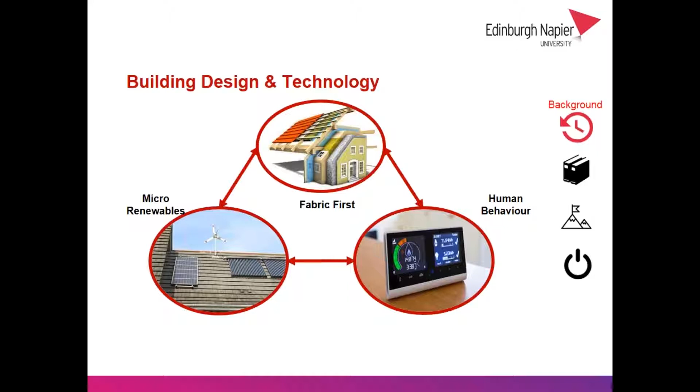Before we get there, we can't really talk about house building or renewable energy systems without first paying homage to the Scottish building standards. Quite quickly, there are 6 of these standards that are mandatory and 1 which still remains voluntary, and each section speaks directly to an aspect of your dwelling's building design and technology requirements.

So today we'll be referring to section 7 quite heavily at the start of this webinar. This is the voluntary section that focuses predominantly on sustainability aspects for new house building, and it includes elements from section 3 around ventilation, section 5 around noise, and section 6 around energy.

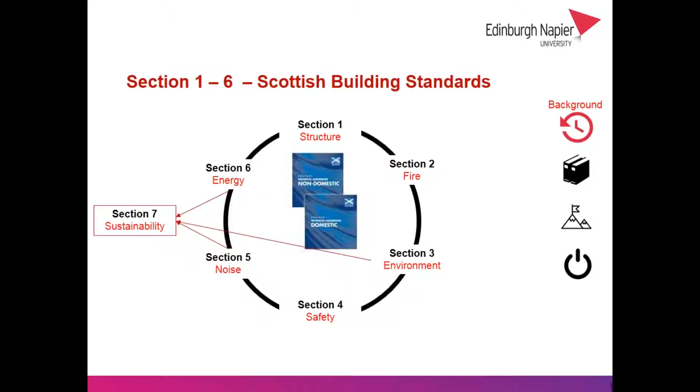So again, just a brief moment to stop and recognise the existence and the structuring of this section 7 sustainability, because whilst it's still voluntary in some respects, it is still being used as a standard that we can adhere to make our homes more energy efficient.

This section is unlike any of the other 6 sections in that it uses a metal labelling system to attract designers and builders to use it. And this is the bronze, silver, gold, and platinum. So if you design and build your home to the other 6 standards, you effectively achieve a bronze standard home.

So if at any point in the dwelling's design you add renewable energy systems without fulfilling all of the other aspects of metallic colouring, the label of your home is then specified as being active, meaning that the dwelling is actively generating part or all of its own heat and power requirements. And the more focus you put on each of these aspects, the higher up the metallic labelling system you go.

Two of section 7's metallic colouring system is divided into 8 aspects. So the silver portion and the gold portion is divided up into 8 distinct aspects.

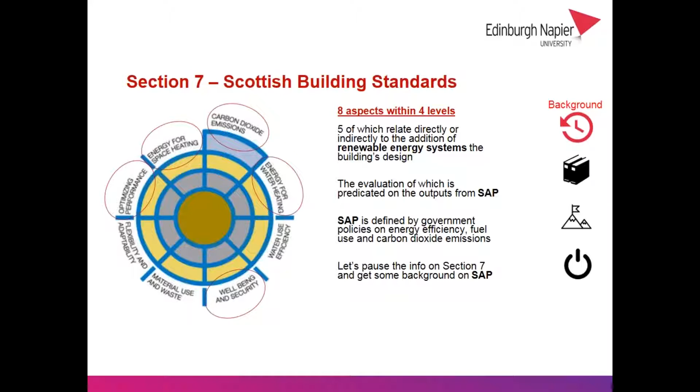And the big takeaway here is that 5 of these aspects relate either directly or indirectly to renewable energy systems and renewable energy technologies. Lastly, the evaluation of whether or not your design achieves certain aspects is completely predicated on the output of the energy performance software that we use to construct energy performance, and what the industry calls SAP. So there's a new term.

So what is SAP? Well, anything related to any aspect of your dwelling's energy requirement and energy performance is defined within this SAP, the Standard Assessment Procedure software. So you really can't work in the domain of domestic dwellings and domestic construction without the use of SAP and understanding what it requires. SAP probably does deserve its own webinar, but the important thing is that we recognize it here on our way to talking about micro-renewable systems.

And the big takeaway here is that SAP is a software used to define your home's energy efficiency, and then ultimately produces all the all-important energy performance certificate, or the EPC.

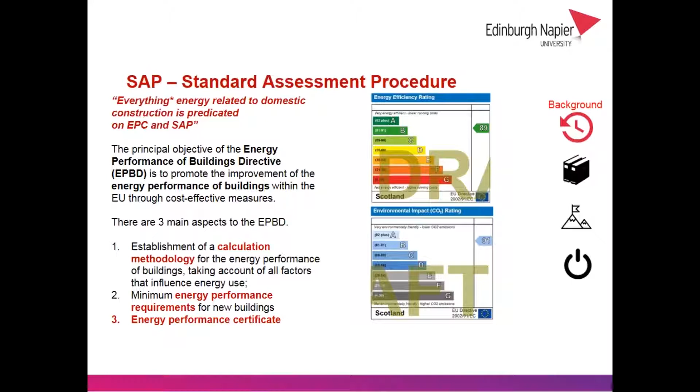So why is this important, and why are you hearing about SAP when you showed up to hear about renewable energy systems? Well, we'll get to that in a few minutes, but before that, you should be aware of some terms used by SAP, which are used to evaluate whether or not your home should be built under the guidance of section 6, and that's the energy one.

So when your designer is virtually constructing your building, your home, in this SAP software, one of the final outputs is the DER, or what we call the dwelling emission rate. And whilst your designer is doing that, the SAP software effectively creates a comparator or notional dwelling that is built to the very basic standards of energy efficiency. And that's what we call the TER, or the target emission rate.

So ultimately, your designer needs to virtually construct a dwelling whose DER is lower than the TER. And the greater the difference, the further up that metallic colouring scale you get in section 7.

When we say emission rates, we're explicitly referring to the carbon dioxide, the CO2 emissions that are emitted from your dwelling during its operational life. That has nothing to do with the CO2 characteristics of how the house is built or the materials it's built from. It's specifically relating to the electricity and heating you use to keep the home powered and warm.

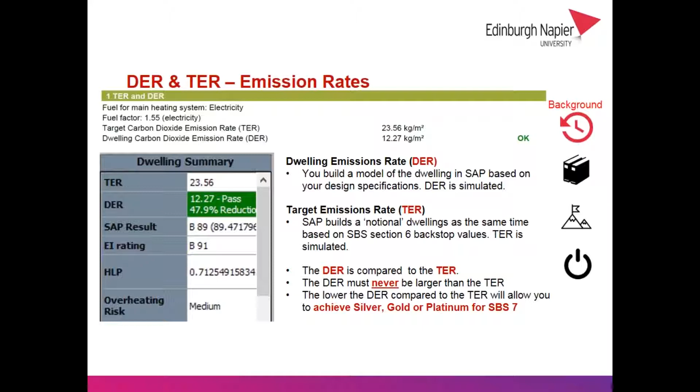According to the standards in section 7, your dwelling will achieve silver in aspect 1, which relates to CO2 emissions, if your dwelling's DER is lower by any measure than the TER.

If the dwelling emission rate, the DER, is lower than the TER by 30% or greater, up to 43% or more, then the home will achieve gold standard. So when your DER is better than 43% over the TER, your home achieves gold in that aspect for carbon dioxide emissions.

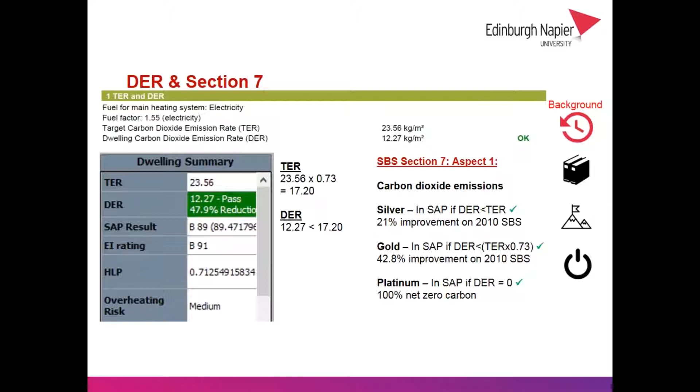A final few words on section 7 before we get into the relevance of this in relation to renewable energy systems. SAP also produces a very valuable number, the space heating requirement, which is the amount of energy your dwelling theoretically needs to keep its occupants warm. That's the total energy requirement per year divided by the total floor area of the dwelling you're trying to heat.

This number is used in some capacity to size the heating system you need to install. It also comes back to the fabric-first approach we mentioned earlier. The more energy efficient your building fabric is—walls, floors, windows, doors, etc.—the lower that number will be, and the less work your heating system will have to do to achieve it. So it all begins to tie together.

Section 7 aspect 2, for space heating, is also a target for silver and gold. If you're building a house or flat, this guidance in aspect 2 tells you what target you should be aiming below. In our example, we have a home whose space heating requirement is 13 kilowatt hours per meter squared per year, which falls under the 30 kilowatt hours per meter squared per year threshold for gold—so it's essentially a gold standard home in terms of aspect 2.

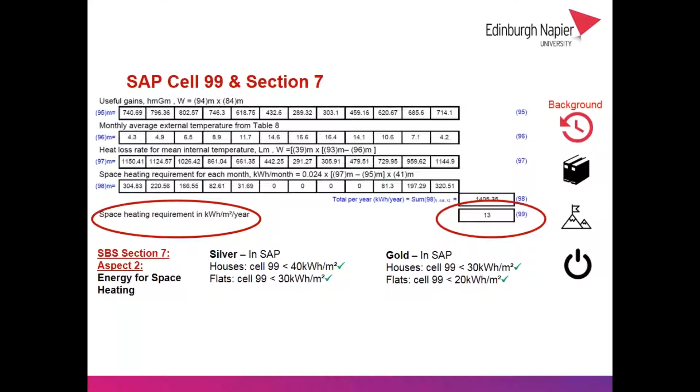Now back to other aspects within section 7 that speak directly to renewable energy systems—this time for water heating. That last aspect, aspect 2, was for space heating, and this is for water heating. The building standards treat both separately, even though you might be getting the energy from the same power source.

This aspect is affected by the size and type of renewable energy system installed on your dwelling, and the higher the percentage of hot water demand met by your preferred renewable energy system, the higher up that metallic colouring scale you go. Again, there's a theme here: getting closer to gold, closer to platinum—moving from bronze to silver and silver to gold—requires you to do quite a bit more in terms of carbon dioxide savings.

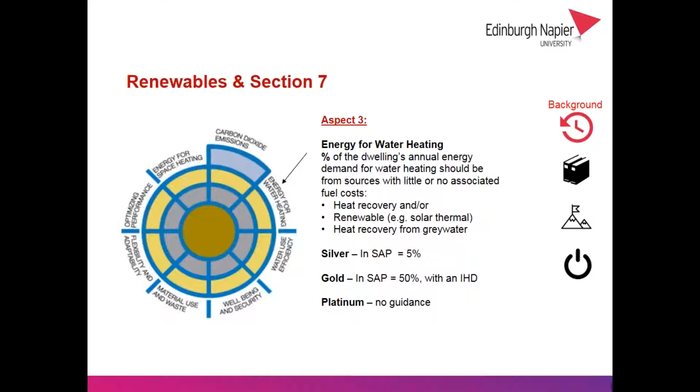Last words on building standards in section 7, concluding our background portion of the presentation. Aspect 5 is often an overlooked aspect that might seem quite trivial when you read the standards. However, it is potentially the most important, because it specifies the in-home display and the new home user manual that we mentioned earlier as one of our key components for energy savings.

Research is quite clear on this: to make the most of your newly built energy efficient home, all its characteristics, and to keep energy bills low, is very much predicated on energy use behaviours. You can build an extremely energy efficient home but use it unwisely, and that can really affect your overall energy consumption, knocking on to your energy bills and CO2 emissions. So we must provide occupiers with tools to help them understand and use their new homes effectively. This by no means excludes self-build—just because you understand your home much more than someone who buys from a mass house builder doesn't exclude you from this standard.

So now let's bring that all together.

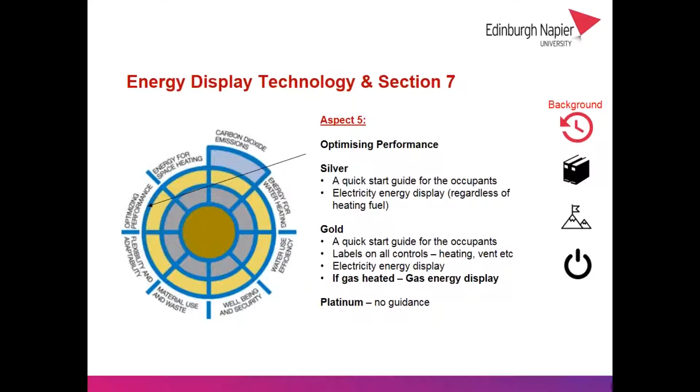Recently we've witnessed the introduction of a new iteration of SAP called SAP 2012. So dwellings that previously passed on SAP 2009, and therefore passed the energy and CO2 requirements allowing them to be built, are not passing the energy and CO2 requirements for SAP 2012.

So if you're not influenced by the notion of renewable energy systems because of your building's location - if you're off the gas grid and looking into options for renewables and how to provide more efficient energy supplies - or if you're not motivated by the cost benefits of renewables, or the environmental benefits of renewable energy systems, then please be aware that it has become, and will become, increasingly challenging to design and construct new dwellings without the integration of some type of renewable energy system.

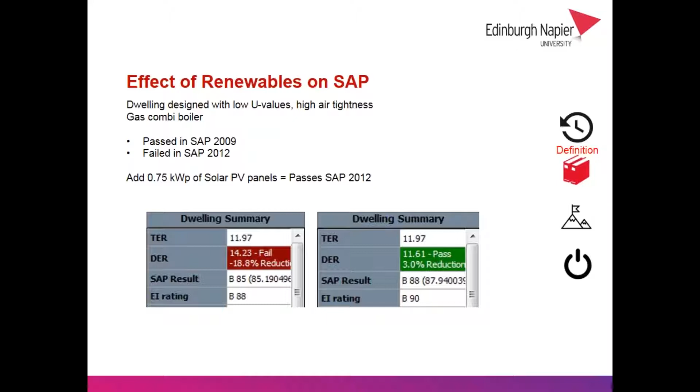So we're on this policy chart, so to speak. We've spoken around the topic of renewable energy systems for long enough - let's get into the core of this webinar.

For the avoidance of any doubt, when I refer to renewable energy systems, I mean technologies that generate energy through naturally reoccurring phenomena - so that's solar and the movement of wind and water. Explicitly, these are energy generation technologies that replace technology depending on burning fossil fuels.

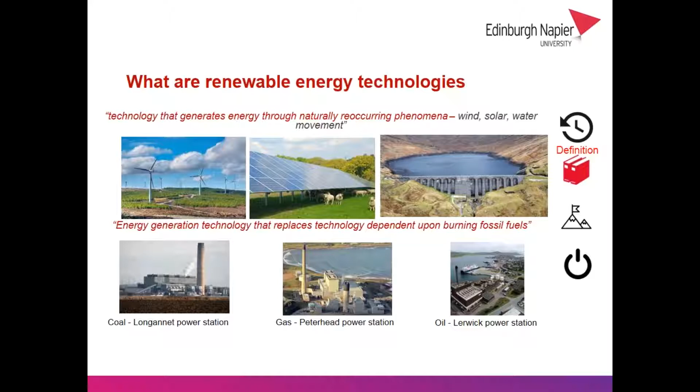So the next big definition we need to concern ourselves with is scale. Here we introduce two new terms that are now commonplace: macro and micro, or more simply, big and small. Macro renewable energy systems are those you see as parts of onshore or offshore wind farms, or solar farms, or giant hydro dams.

The last half of my presentation is going to focus solely on the micro level of renewables - those you'll be seeking to attach to your building's fabric or placing within the building's curtilage somewhere. So I won't be referring to meso technologies. Those are in the middle of micro and macro, like community and neighbourhood heat and power systems, or hydrogen systems, or district heat systems - those are definitely for a different webinar.

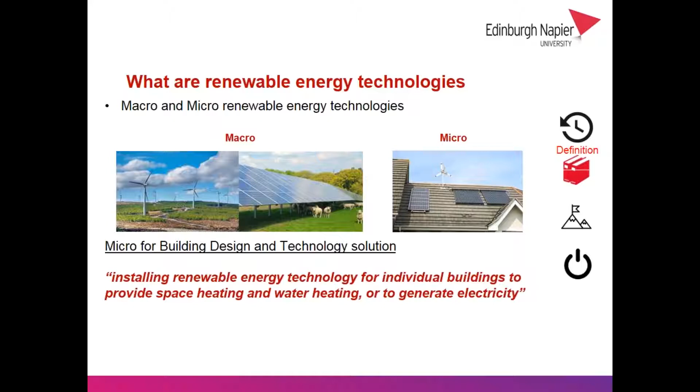Let's do a quick sense check - I'm going to jump forward a little bit, I got this in the wrong order. So let's do a quick sense check, reminding everyone of some high school physics before we crack into our definitions and your options for renewable systems.

So you'll hear me saying words like kilowatts and kilowatt hours, and you might already be very familiar with both. Most of those concerned with inspecting energy bills will definitely be well versed with kilowatt hours, and the more engineering minded amongst us will understand what kilowatts are. But importantly, the words power and energy, and the units kilowatts and kilowatt hours, are absolutely not interchangeable.

Your renewable energy systems or technologies will be classified by their power rating - they'll be classified as kilowatts - but their effect on your overall energy bill will relate specifically to your home's energy performance, which is stated in kilowatt hours.

So manufacturers, suppliers, and installers really avoid giving you any data on kilowatt hours, which is really what most of us are looking for - the big question being, how much will this save me on my energy bill? The reality is, because these technologies are linked to naturally occurring phenomena, the system's energy performance in kilowatt hours really depends on where your house is located and the positioning of that system in relation to the proximity of your home.

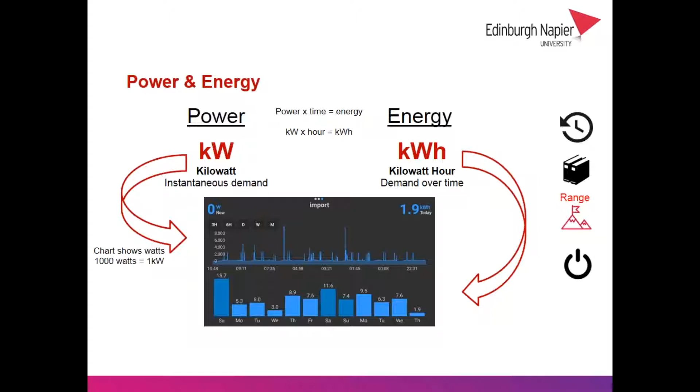So where are we now? I think we're back a slide, sorry about that. First of all, the following 10 slides are configured pretty much the same way, in which you'll find general rules of thumb we've created over the years of studying renewables that help you work out the size or how many of each technology you might need, important design considerations, and additional technologies you need to be aware of when considering different options.

For most technologies, I've included some primary data charts showing the performance of some of our technologies from our various real-world test sites around Scotland. Unfortunately, we don't have time to go into a lot of detail for each of these technologies, so I'll do an introduction to each, and you can use these slides as reference materials in the future.

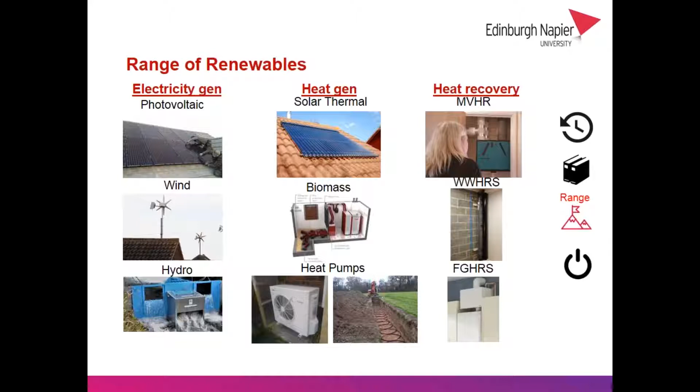So solar PV, where are we now? Or to give it its full title, photovoltaics. This is the first of two solar panels I'll be speaking about, but both panels do very different things, so the term solar panel can be confusing until you specify which one you actually mean.

The efficiency and performance of solar PV is very much predicated on its location on your building and its relation to the sun. Those designing energy efficient homes tend to orientate the large parts of pitch roofs to as near due south as possible. We're quite fortunate in that our pitch roof designs tend to be angled between 30 and 45 degrees, which conveniently is also the optimal angle for solar PV panels.

The equation for power output and overall energy generation for PV panels is relatively linear. The more panels you have, the more instantaneous power you'll receive during peak sunlight, and the more energy generated over the summer months. Solar PV is by far the go-to technology for most house builders, least of all because of its ease of installation and because it naturally sits on our roof.

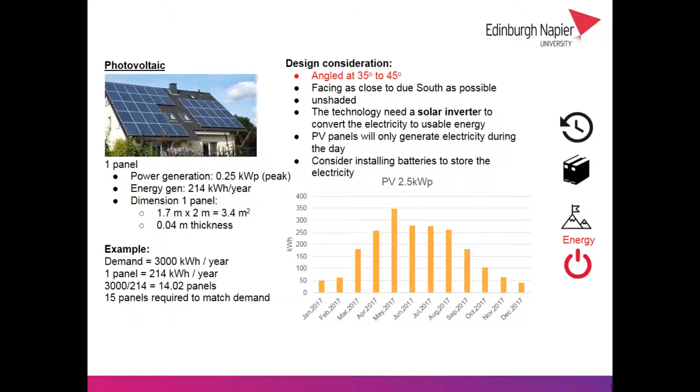Moving on, wind turbines have really had quite a shaky rise to fame. There's a reason we don't see as many of them at micro scale as we do at macro scale, compared to PVs. The reason comes down to location and positioning of the wind turbine.

Micro wind turbines have the ability to rotate and find the wind, which makes them really effective. However, we must be concerned about the type of wind the turbine receives. When wind bounces off trees and around geographical formations like hills and cliffs and around buildings, these create vortices, and that's really bad—what we call dirty wind. Even though the wind might be blowing really strong, if it's turbulent, the turbine is much less effective.

Micro wind becomes really effective when positioned perfectly, away from trees, hills, cliffs, and buildings. That's why we don't see so many building-mounted wind turbines anymore. But when positioned well, even small wind turbines are effective.

Their typical energy output is the inverse of the energy output from solar panels—that graph looks inverted compared to the one for solar PV. They produce more energy in winter, where PV produces more in summer, so they can create quite good counterparts across the year.

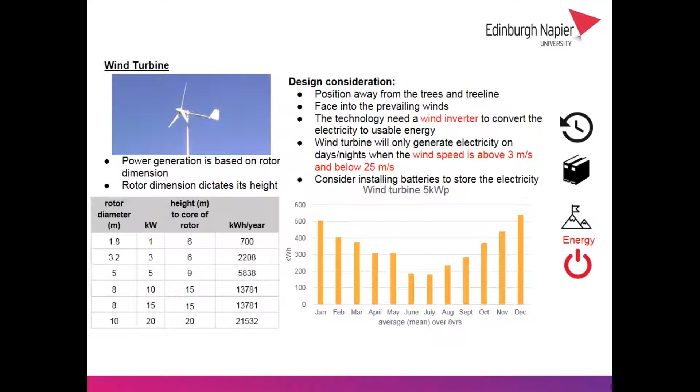The next technology on the electricity generation scale is hydro. We're used to seeing these at massive, macro level, but we're beginning to see a trend coming down to the micro level. Unusual for renewable technologies, hydro systems have a completely different definition for small water turbines.

When looking at domestic energy or power demand, you're kind of around the 5 kilowatt range. Hydro is quite unique in this, where below the 5 kilowatt range, they're actually called pico. That will help you refine your searches if you have a good water course on your site and want to consider it.

The nice thing about hydro is that, depending on the stream, the size of the water course, and the fall in the water course, the energy output can be quite constant. But the efficiencies are a bit like wind—they aren't as great.

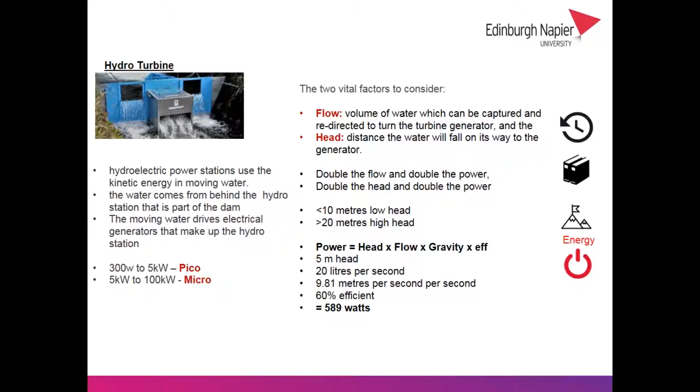What you need to be aware of is if you have a water course on your site that looks like a viable option—there's a relationship between the flow and the drop in the water going down a certain height, which can easily be calculated, even on the back of an envelope, to work out your power supply. If the water doesn't freeze over winter or surge during spring, that power supply will be fairly constant.

Right, so moving away from electricity and looking now at heat generation.

I'm going to move through these quite quickly because we're pressed for time just now. But the thing to be aware of is the technology that comes behind your renewables.

With all water and space heating technologies, there'll be a piece of technology you need to be aware of called a thermal store. This is essentially a rebrand of a hot water tank, only it is more highly insulated, and it's got multiple entry points along the vertical length of the thing. So different heating systems will drop temperature into the hot water tank at different locations to help stratify the hot water in there, slipping in the thermodynamics there. But the important thing is you need to find space for this thing.

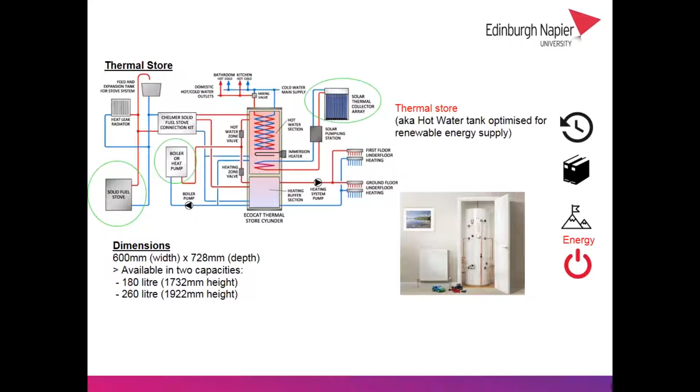If you're considering some type of heat system, like solar water heaters or heat pumps, etc., you need to find somewhere to put this. The nice thing is if you have one, there's going to be ports left in that thermal store to then retrofit technologies down the line.

So let's kick off with solar water heaters. The big takeaway from solar water heaters are the energy output of these is not linear. So it's not like PV - the more solar water heaters you add doesn't translate directly into more hot water. Once you leave the one panel or the one or two panels, the efficiency really does drop off. So we've got a chart here, and this has been normalized per person in a home.

So it's a cluster diagram. The overall demand is in red, and the energy generation per month is in green. So you can see that it can do quite a bit.

The most important thing is that this is another solar panel. It is referred to as solar thermal or solar water heaters, and it is restricted or limited to the same design principles as the PV. It needs to face the sun, it needs to be quite close to due south, and angled at 35 to 45 degrees. So the big takeaway here is that solar water heaters are not a standalone piece of equipment.

That is quite important because any water that you're storing in your home for hot water, for example, needs to be heated over 60 degrees Celsius at least once a day over a period of 1 hour a day - that's to kill off bacteria like Legionella. Solar water heaters can possibly achieve that 2 or 3 times during the year, but for the vast majority of the time, they can't do that alone. So they really are a secondary backup system for some other type of water heating.

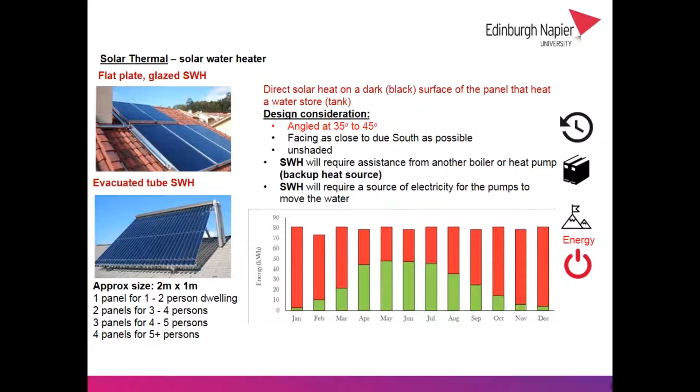So there are 2 varieties of heat pump - I know there's multiple other ones, but these are the ones I really want to focus on. So air source heat pump. These tend to get quite a bad rep because you're thinking colder parts of the UK and Scotland, the air is cold, so how could you possibly catch any heat from it? The reality is the thermodynamics behind this technology compresses and handles heat in a very different way from perhaps what we're used to. So they can be very effective.

Got some rules of thumb there for sizing an air source heat pump, but the thing for you to be aware of is the all-important coefficient of performance, the COP. Now, sometimes, and this is quite overlooked when it comes to specifying or thinking about heat pumps, is that heat pumps are only renewable, can only benefit from absorbing warm air from the atmosphere if you're able to power it from electricity. So you can't simply install a heat pump without having some form of electricity supply going to it.

So that's where we get into the COP, this coefficient of performance ratio. For every 1 kilowatt of energy or power, the electricity power that you give to the heat pump, it then can generate between 2, 3, maybe even 4 in some instances, kilowatts worth of heat. And that's quite important whenever you're considering how they perform over time.

So the graph there shows the COP, which is the coefficient of performance. Another way of looking at this is percentage of efficiency. So once you get to 1 equals 100% efficiency, and over 1, you're talking 200% efficient, etc. These are from multiple properties in Scotland along the central belt, and you see the COP, the coefficient of performance, always stays above 1.

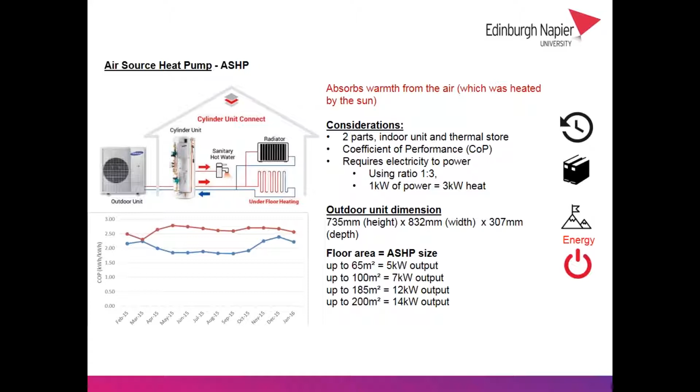So you're always getting more heat back than the power you're putting in, which is very good for heat pumps. Ground source heat pumps work pretty much the exact same way. The only difference is where it gets its heat from, being ground source.

Some people tend to think that the heat comes from geothermal heat reservoirs. That's a bit of a myth. The heat collectors for ground source heat pumps are very much affected by the solar radiation on the first couple of meters of the Earth's surface. So it really is absorbing heat from the Earth's surface that's been preheated by the sun during the day. But then those first few meters at the top of the Earth act as a thermal battery, and they tend to hold temperatures a bit better than air does.

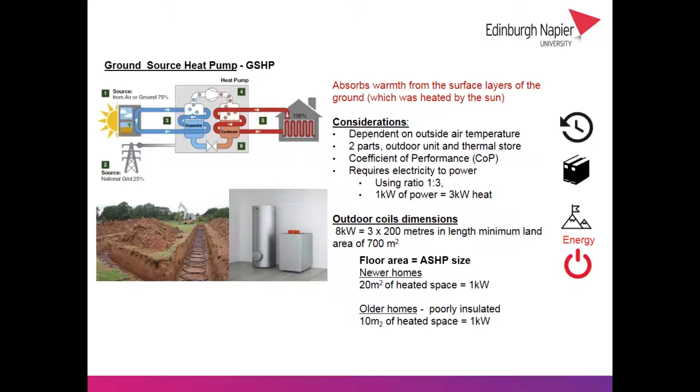So that means your ground source heat pump runs a little bit more efficiently. The very important thing here is the sheer amount of size and space you need around your home to lay these coils or to lay boreholes for you to drop your collectors into.

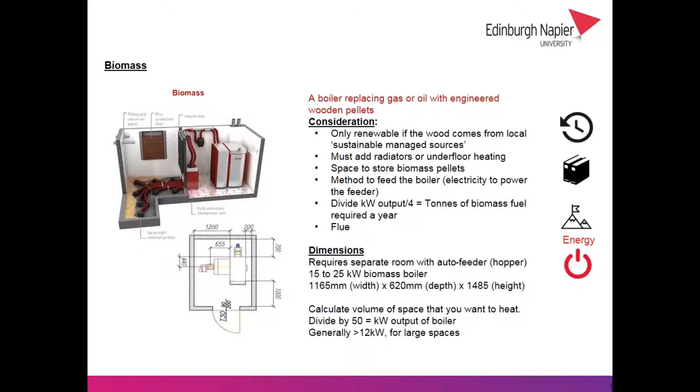Some equations there for you to think about how much space you might need and how much space you need for the materials. Because unlike wood burning stoves, biomass boilers drink a lot of these little wood pellets.

So I'm going to wrap up by looking at heat recovery options, sometimes overlooked in the realm of renewable energy systems, but these are becoming more prevalent because as we go down the pathway of Section 7 sustainability and making homes more energy efficient, there's less we can do to actually help achieve its efficiency. What that leaves us with is recovering heat that escapes through ventilation or through exhausting air or water.

So as buildings become more airtight to try and address the balance of losing heat through ventilation heat loss, through drafts, what have you, we're looking at effectively sealing up our buildings for ventilation. So to compensate that and to be considerate of things like condensation and indoor air quality, we have mechanical ventilation systems that run continuously to help maintain that air quality.

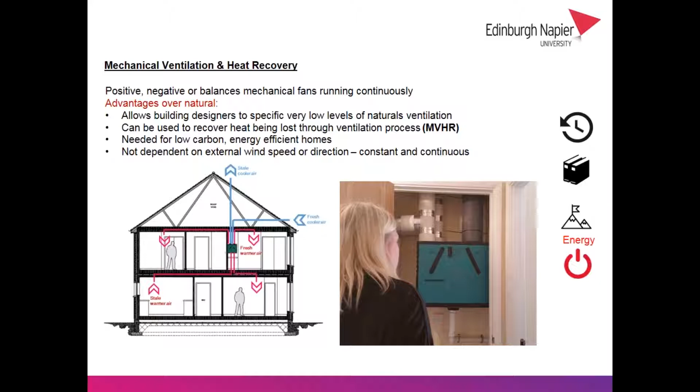Now, if you're considering quite an airtight building to help achieve its efficiency, then recovering the heat of the air that you're exhausting just makes an awful lot of sense, because that preheats the cooler, fresher air coming in, and it means your energy system, whatever it may be, whether biomass or heat pump, doesn't have to work so hard to reach those temperatures.

Last two pieces of technology worth giving a nod to, because they do appear in SAP, are our flue gas heat recovery system and our wastewater heat recovery system. This system isn't particularly efficient because it's essentially a bolt-on for most combi boilers, gas combi boilers, and the reality is we've gone pretty far down the line as far as fundamental thermodynamics allows us to make combi boilers efficient.

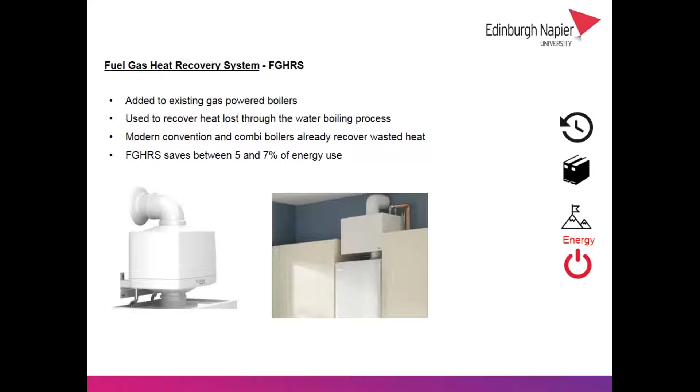What this piece of kit does, essentially, is recover some of the heat from the exhausted air put out the back of the boiler, and then it preheats the water coming into the boiler. So it can be an option, but maybe not as effective as the other ones we've spoken about today.

Something that's kind of hitting our industry in some way is the wastewater heat recovery system. This is just a no-brainer. It's simply putting a heat recovery system on any of your appliances that exhausts a lot of really warm water - I'm thinking showers, bathtubs, dishwashers, and washing machines. So you're dumping out water that's possibly 60 degrees or around there.

So recovering the heat from that and preheating cold water coming in to save your boiler from working so hard, that's just really a no-brainer. And the nice thing about this is it doesn't take up a lot of space.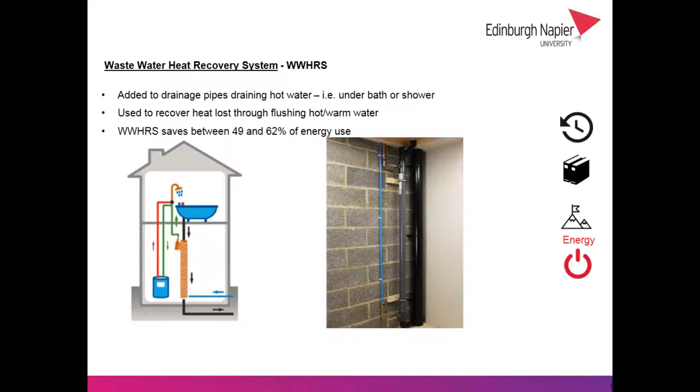The reason why I selected those technologies is because they're the ones you'll find inside SAP. They're the ones that have been around the longest, that have really proven themselves, that we've got the most data on, and that we can see as being the most reliable. But always remember, when it comes to renewable energy systems, whether for electricity, space or water heating, or heat recovery, you're always dependent on some natural phenomenon, so it's really hard to get those data sets on how much energy you're gonna get during its lifespan.

Ultimately, it's there to help reduce your overall energy bill. So the final big takeaway is, if you install a renewable energy system, something like solar PV, these systems aren't fit and forget. You can't just fit them on, expect them to be efficient, run them, and leave them where they are. They also require a certain amount of behavior change. Things like running washing machines, tumble dryers, dishwashers during peak daylight hours, that's when you get the most from things like solar PV. So there are subtle behavior changes you have to adapt when incorporating renewable systems.

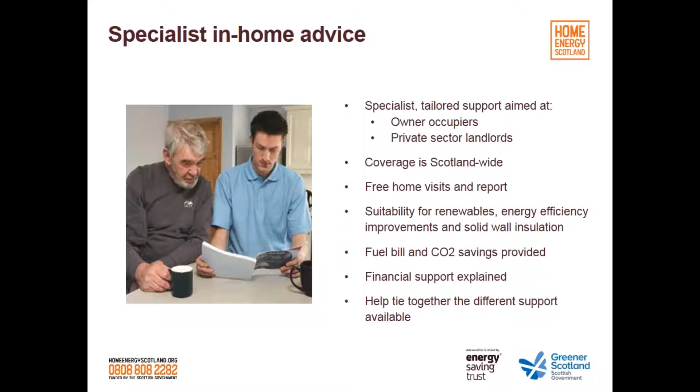This support can be offered on a basic level, just discussing different renewable technologies that might be suitable for your property, or on a more advanced level where an assessment of your property or proposed development is carried out by reviewing things like your floor plans, design specification, or architect's drawings. This advanced assessment is made possible because we have bespoke modeling software developed following the SAP methodology John referenced before, which works in the background for energy performance certificates. Importantly, this software allows us to overwrite some of the default assumptions and U values and create a range of scenarios or possible routes to improve your property.

So specialist advisors will be able to take the information from your planned development and input these into the modeling software. This allows us to model the building to the proposed specification, where we can then create scenarios which represent alternative options.

So for example, if you're intending to install an electric heating system, we can model the cost and carbon savings of integrating solar PV into the design, or installing an alternative heating system such as an oil boiler or heat pump.

At the end of this, the model will create a report called a home energy improvements report. This also acts as an eligible energy report if you're to access funding through one of our financial support schemes, which I'll cover in a minute.

We recognise that mistrust in the underlying technology is one of the main barriers to the uptake of renewables, which is why, with the support of the Scottish Government, we are able to offer this free and impartial advice service that is bespoke, tailored to the individual's needs, whether that be to find out further information on the technology or to estimate those savings.

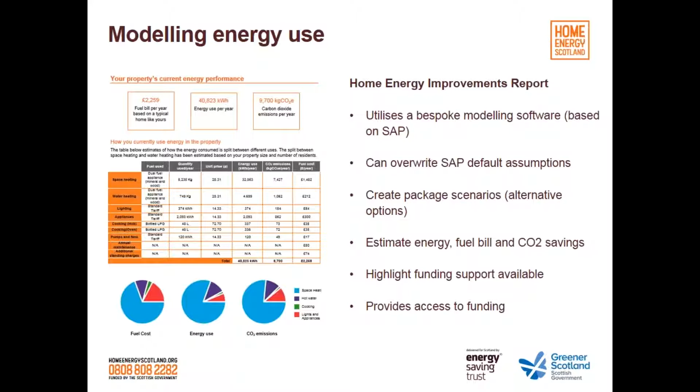One of the other main barriers to the uptake of renewables is the associated costs. Thankfully, there are a few financial schemes available to incentivize self-builders to integrate renewables into their property's design.

These include a Home Energy Scotland loan, which is something that we administer, the Domestic Renewable Heat Incentive, and the Feed-in Tariff Scheme. I'm not going to go into too much detail here as there's a wealth of information on our website, and we have covered the available funding in a past webinar, which you can access on our YouTube channel, the link for which should be at the bottom left of your screen.

The Home Energy Scotland loan is an interest-free loan funded by the Scottish Government and administered by ourselves. It's designed to help overcome the upfront costs of installing renewables, and includes energy efficiency improvements and energy storage systems as well.

It also covers connections to a district heating scheme that is powered by renewable technologies. Unfortunately for self-builders, the loan scheme will not cover energy efficiency improvements such as insulation and glazing, but it will cover the other improvements.

You also have the renewable heat incentive, or the domestic renewable heat incentive, which is designed to incentivize early adopters of renewable heat technologies by making quarterly payments over 7 years for any heat that's been generated, such as heat from a heat pump, solar thermal, or biomass boiler.

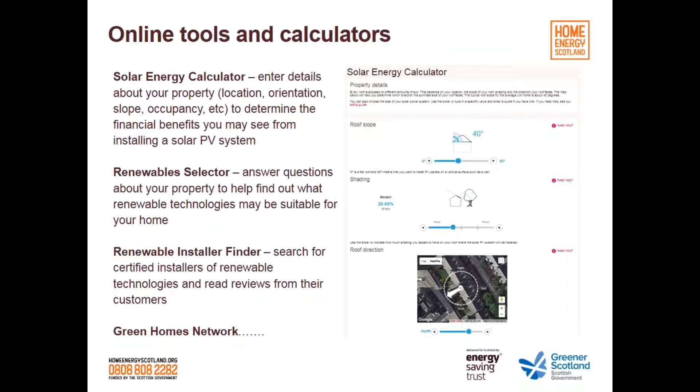Another one of those tools is the Renewables Selector tool, which highlights the potential suitability of different heat and electricity generating technologies by asking a series of questions about your property. For example, if you're looking to determine the suitability of solar PV, there will be a page that will ask you about your property type, roof characteristics, and at the end, once you answer these questions, you'll get a report which provides info on the different suitable technologies for your property.

Another tool that we host on the website is the Renewable Installer Finder tool. This allows users to search for certified installers that operate in their local area. You can filter by distance from your home or a specific technology, and it also includes reviews from past customers. It's a very handy tool if you're looking to install renewable technology but you're unsure where to find installers or who to trust.

And then finally, we've got the Green Homes Network. This is another resource which I'm not going to cover just now, as I'm about to pass you over to my colleague Joe, who's going to give you an overview of the network, and we'll be discussing one of the case studies with a network member.

So that's all from me for now. Just a quick summary of the support available to individuals looking to build their own home - but it doesn't matter whether you're a homeowner, private landlord, or self-builder. There's a bunch of information and resources on the website, and the Home Energy Scotland advice team are there to support you on a range of topics. I've by no means covered all the support available, so I strongly advise anyone looking to save money on their energy bills, improve their property, or live more sustainably to give Home Energy Scotland a call. It's all free and impartial, so there's no hidden agenda, just friendly, helpful advice.

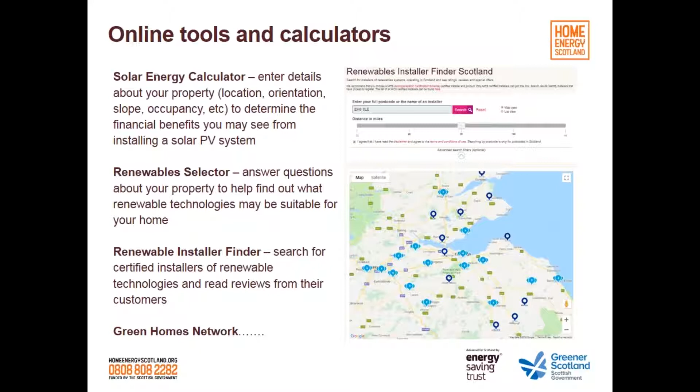So I'll now pass you back over to Joe, who'll give you an overview of the Green Homes Network and discuss a case study with one of the members. Thanks everyone for listening.

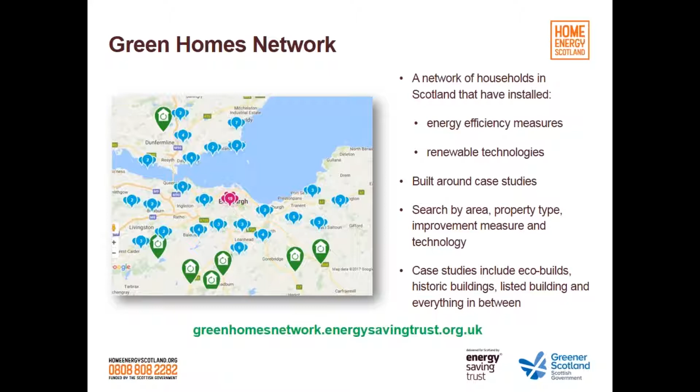Well, my wife and I felt quite passionate about trying to eliminate fossil fuels from our lives, not just the house, but personal transport as well. And we believe in example - we think that when you see things and touch them and smell them, then it really does begin to mean something.

Oh, so it was actually motivated by environmental impact reasons as well, not just about having a purpose-built home to your own specifications. That's really encouraging. Can you tell us a little bit about your home and the insulation and renewable technologies you installed?

And by massive, we mean beyond the building control regulations. So did your property actually surpass building standards? At the time, it certainly did. I don't know what they are now, but I'm sure it still surpasses them.

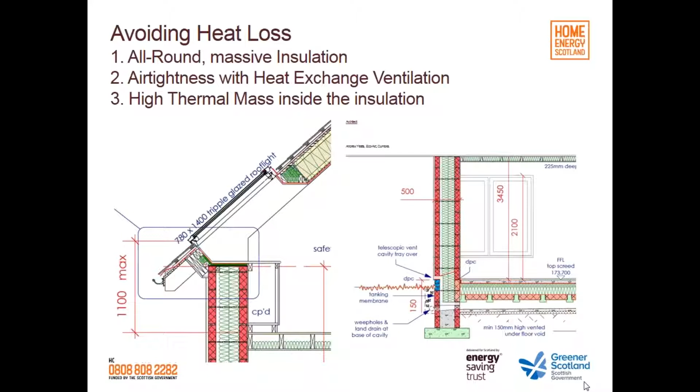And can I just ask, so that's the envelope of your property and keeping all the heat in - how are your power requirements met in your property now? Well, if you go to slide 10, there's a useful picture there. The point is that if you've avoided heat loss, how you actually heat the house becomes less significant.

And this design was passive solar, which means sun shining through the windows essentially, boosted by this lean-to conservatory. Now, the wall on the left is external insulation with triple glazed small windows. But this is a double glazed conservatory facing south, again with massive heat storage in the floor and the walls.

Because to me, that looks just like a normal conservatory, but that actually helps to heat your home. Absolutely, yes - particularly for spring and autumn it's very useful. At the moment we've not had much sun for a few days, but what little we've had has been heating that up, and as I'm sitting here now the doors and those little windows are open, taking the heat into the house.

You mentioned you've also got south-facing windows in addition to the conservatory - how big do they need to be to allow that to work as an air heater? Well, I think it's a bit of an inexact science - plenty is about as precise as I could get. One thing I did learn was that the triple glazed windows actually put less heat into the house than double glazed, but of course they stop it going out, so you're not in such danger of overheating.

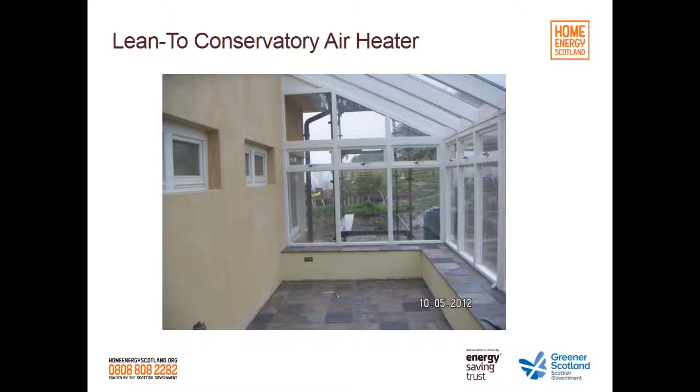So what I'm taking from this is that although you've installed some renewable technologies in your home, you don't have one main renewable heating system or any central heating system. Right, there is no heating system. But if you go to slide 11, the next one, we do have a backup system. Obviously, in December and January there is virtually nothing coming from the sun, and depending on weather, November and February may also require some assistance.

This is what we call a masonry stove. It's a wood burner encased in massive masonry with channels for the flue gases to go down and dump their heat. Heat comes straight out through the glass from the firebox, but there's no overheating because the rest goes up into a top chamber, down the sides, along the front, into the heated bench on the left, then into the masonry chimney, and only into the flue above that. By the time it's run around there, all the heat has been dumped.

So even though it's a stove, it's not a single room heater. It is heating the full property, it is central and it is heating. Oh wow, it actually goes through the wall that's in the picture there. So the back of the stove is heating the other main room.

Can I just check, does that also provide hot water as well, or do you have another method of providing hot water? It can be designed to do that. We could have had a boiler in, in fact we could have even had a bread baking oven in the top chamber, but we chose not to because we wanted to focus this on heating the house, and we have other technologies for heating water.

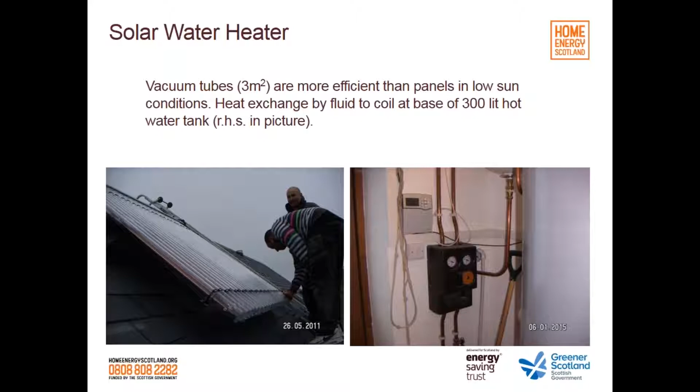And you mentioned you've got a 3 meter squared system on your roof, but you also have solar PV on your roof as well. We do, yeah, on picture 8 you'll see that. Oh yeah, so you put them on together, size wasn't an issue or anything like that? No, in fact we put those on later.

We use a turbine to cover the electricity demand for the house, and that works perfectly well. But we decided to run an electric car as well, and for that I calculated we needed 12 of these panels to give us 10,000 miles a year.

And do you find you often need to take electricity from the national grid, or do you find that being able to store your electricity is sufficient? We take quite a bit from the grid, so we're buying and selling from our supplier. I think the amount we generate is roughly equal to the amount we bring in, but of course we earn more money from what we generate than what we sell.

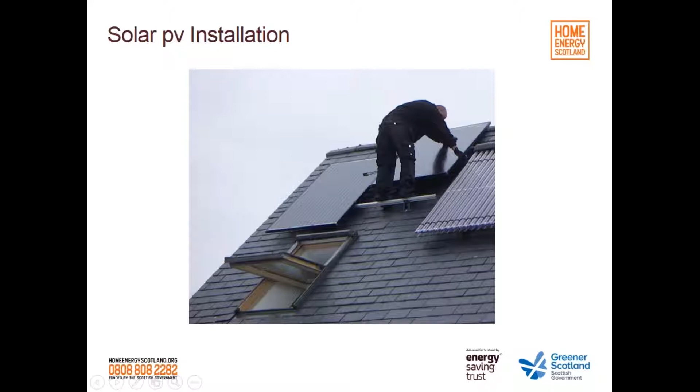I think you've got a handy graph to show the difference between your costs, so one question I was going to ask, and I can probably tell the answer from looking at this graph, is do you think installing high levels of insulation and renewables in your home was cost effective? Well, to be honest, the only way we could do this project was by ignoring payback periods, cost benefits and such like, because I believe they genuinely do mislead you.

We've come out of this at the other end, and that's the picture for our direct energy costs. We've put capital in there, but the whole project was substituting capital investment for future renewable costs. And of course, when you do cost benefits in the future, it's highly distorted because benefits in the future are discounted to nothing, as the damage that's caused in the future is disregarded. So our economic tools are misleading us here.

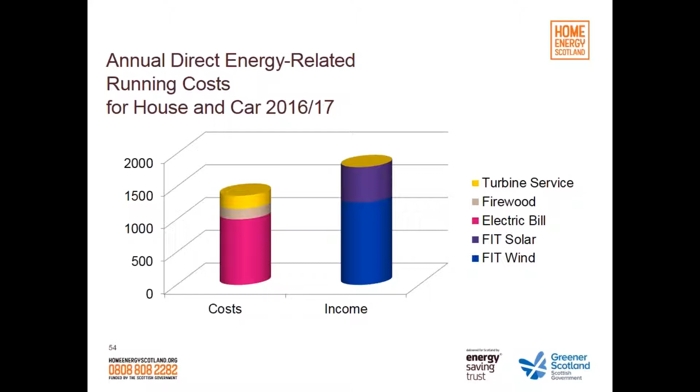Yeah, I mean, I suppose these are estimates, and you make a good point about the fact that you have to put in the capital investment, and obviously things like occupancy and energy use are very specific to certain households. If you look at the next slide, number 12, this is what I consider to be the real picture. If you click on that, it'll highlight the significant points.

The old house, which was a Victorian 1850s house, we'd really done as much as we could. You can see on the left-hand side, very poor ratings, F, and the potential was hardly higher. The 38 was for your rating, and the 44 represented how much better you could make it.

Shifting to the right-hand side now, this house is actually off the scale. We're A rated. You don't see an awful lot of A-rated EPCs, but that's incredible. So it looks like from your EPC, you can't actually improve the energy efficiency or environmental impacts - you've done all you can. Yeah, you've done everything, and that was my guidance for the build.

I suppose if part of your motivation was environmental impact, it goes to show that if you focus on that as well, you're going to improve your energy efficiency rating too.

I'm just going to end by asking: are you happy with the design and function of your home? Would you recommend self-building to others if that was a feasible option for them? If you're able to do from scratch, which I accept many people aren't because they're involved with retrofit, but if you feel confident to do a self-build, yes, I highly recommend it. We're very satisfied with the house, it's very comfortable, and it's very low cost to run. What more do you want?

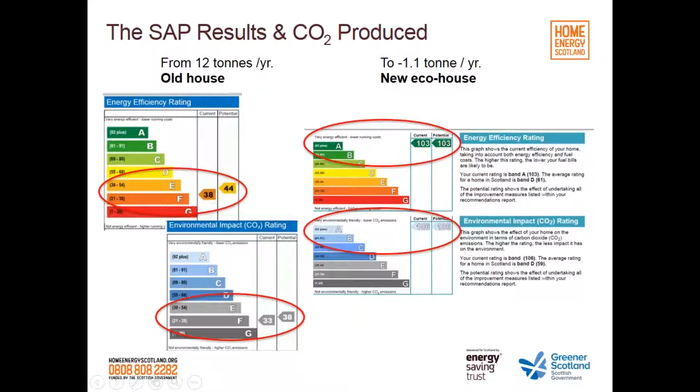So the first one we have is, how much should my architect know about renewables, including how much it will cost to install and the fuel bill cost compared to other options? Right, that's a good question, there's multiple parts to that. The first part is, how much should your architect know?

The topic of renewables falls very much under sustainability, which we've covered in today's talks, and each of your professionals putting your building together - the design team, the building team, the surveying team, etc. - will be chartered by various different chartered bodies. You'll have organisations like RIAS, the Royal Incorporation of Architects in Scotland, CIAT, the Chartered Institute of Architectural Technologists, RICS, the Royal Institution of Chartered Surveyors, CIOB, the Chartered Institute of Building, etc. Each of them requires their members to demonstrate knowledge and learning in the field of sustainability. Now, that's quite an open definition, so some will choose to specialise in renewables, some won't, but everyone will have a good understanding of what renewables are and how they work, because they have to undertake webinars like this - called CPD events - and keep their knowledge up to speed. It keeps them competitive, etc.

So there will be architects who are members of organisations like the Scottish Ecological Design Association, architectural firms who have made a conscientious choice to focus on low energy design homes with renewables and such. Those are the types of organisations you could focus on if you're looking to contact somebody.